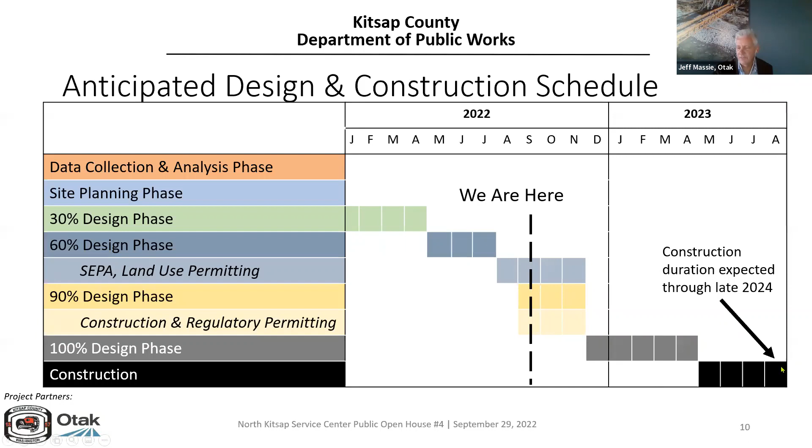This little footnote here shows that the construction schedule runs off this page, but we see this as being a 2-season construction being completed in 2024.

So the completed phases, like we showed in the schedule, I'll give a little more granularity to it. The data collection analysis phase includes things like topographic survey, geotechnical investigation. We confirmed the critical areas, the quality of the stream, the quality of the wetlands and their buffers.

We went through a site planning phase in which we had 2 main alternatives that we came up with. We analyzed those two alternatives. We compared them, including the relative price of one to another. The county did select alternative A.

From that alternative A, we started developing the 30% design plans, refining that alternative A. We brought in all the disciplines - architecture, landscape architecture, stormwater, civil - to refine the design and come up with those plans that we need to.

We gave that set to the county. They provided comments. We addressed those comments in our 60% design phase and kept refining the design as we went along. Currently, we're in the 90% design, like it showed back in the schedule.

We got the 60% design comments from the county and we're incorporating those comments into the 90% design. With that, I'm going to let Sierra introduce herself and talk more about the permitting and the environmental review.

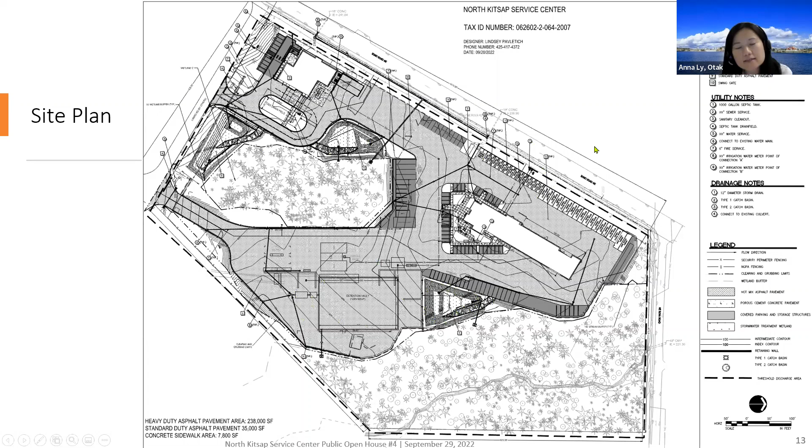The county code requires a roadside setback and separation buffer, so we have two rows of planting along this road, as well as two rows of trees and shrubs and ground cover planting to provide a site barrier. There's also planting along Lambird Road, and planting within the stormwater wetland ponds and around the wetland buffer.

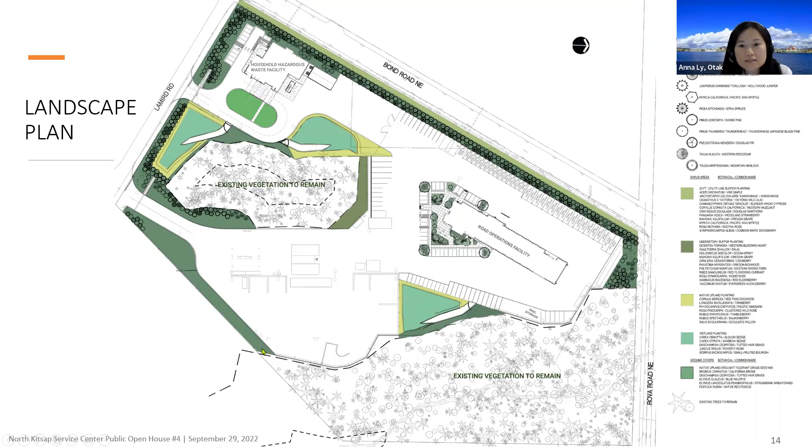On the next slide you'll see some of the different types of plants we've selected: overstory trees at the buffer area, understory tree buffers, and utility line buffer planting. On the following slide there's more understory buffer planting, and the county may simplify this palette once we get further into the design.

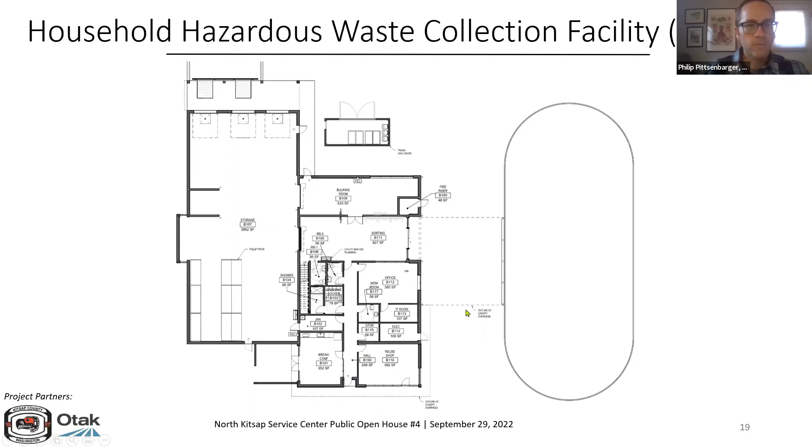On the left-hand side, we see that roof structure again, where we have a sloping roof transitioning to a vertical wall and a large amount of storefront glazing, which will be the reuse shop for the public. That's kind of the most prominent architectural feature in this building.

So we still have a lot of nice natural daylighting throughout the storage and utility areas, to have natural lighting and reduce artificial lighting. It's a nice sustainability feature.

We've developed the materials a bit more since the previous meeting. Like I said, the main structure is concrete tilt-up panels, so those will have various joint patterns and a mixture of light and dark gray concrete. Then there's some framed walls that'll have a different material, a fiber cement, number 8 there, which will probably be a dark material that blends in with the dark concrete so that we don't stand out too much.

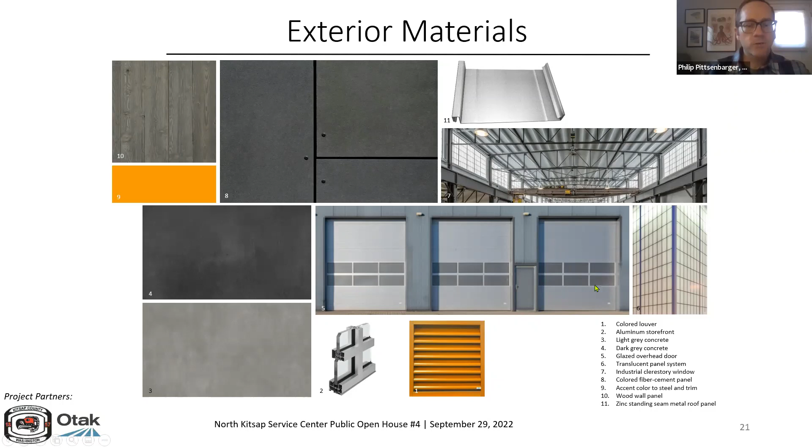Thank you, Philip. So where are we going in the future with this project?

So the future phases, after we finish the 90% design, comes the 100% design, as one would think. Sierra mentioned something about the construction permitting that's going to be going on during the final design phase. So obviously we're going to take the 90% plans, refine them, take the review comments that we get from the county, incorporate those, and put together a construction contract manual.

It consists of the plans and the specifications, in which the county can issue a notice of call for bids, receive bids from interested contractors, award likely to the lowest bidder, and put together a construction contract, which the county will administer, probably with some help from not only the Otak team, but perhaps a third-party construction manager.

And then the construction will start taking place like it showed on the schedule. We'll show that again here in just a minute.

But the basic elements of the construction will be temporary erosion and sedimentation control, clearing and grubbing, and a lot of grading. We want to utilize on-site materials for most of our grading, to take some of that hilly surface and make it flatter so we can put up the buildings and other features there.

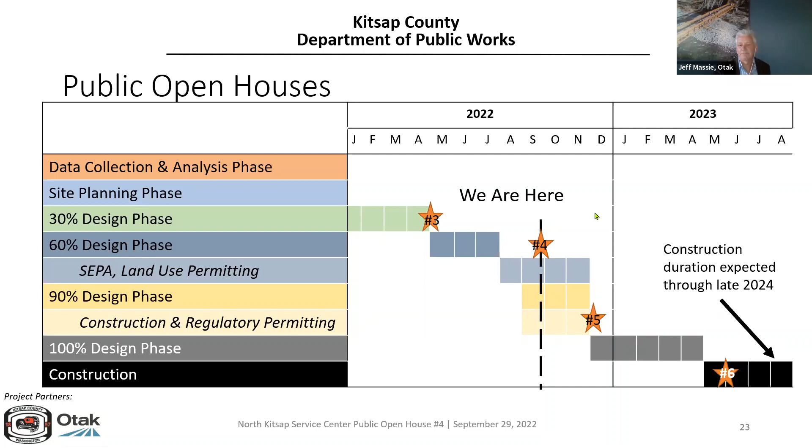Great, thank you, Jacques. Good evening, my name is Eirik O'Neill. I am the outreach coordinator for Kitsap County Public Works Roads Division. And at this point, we will go ahead and open it up for questions.

The first question we received was, Jeff, I'll toss this to you. The question is, what does Otak mean? I came to work at Otak a few years ago, so I looked it up online, and I think Otak means like brains in Indonesian. I don't know if that's happenstance, but really most consultant names like Otak are an acronym that stands for the founding fathers of the firm. I can't remember the names of the founding fathers, but I can remember the name Otak as the acronym.

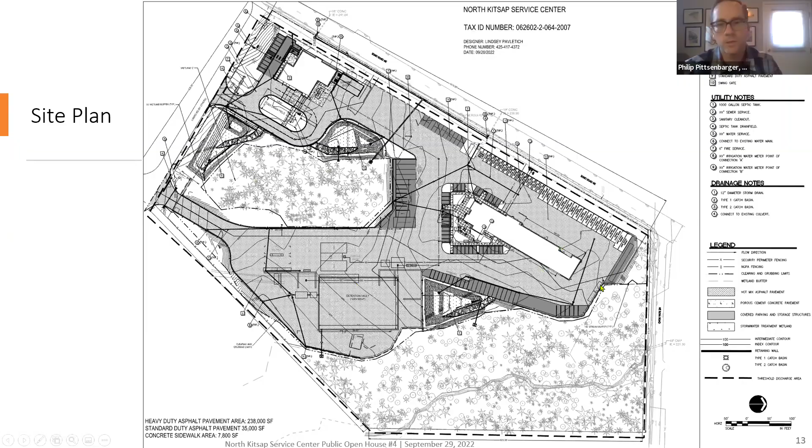I can speak to that. New Washington Energy Code is probably one of the most stringent in the United States, so any new building is required to be extremely energy efficient. We ran the energy modeling through the state's software, and we beat the current energy code, so they're pretty energy efficient buildings. Inside the tilt-up panel walls there's a large amount of rigid insulation to help the heating and cooling.

The maintenance bays, by nature, are not very energy efficient because we have large doors and openings for trucks to drive through, so that's a partially conditioned space. The walls between that and the office space are also insulated, so we save energy there. A lot of daylighting and radiant floor heating in the maintenance bays is a very efficient way to heat a space like that.

The Washington Energy Code is so stringent that all the lighting will be LED. We'll have photovoltaic panels on the roof to help offset energy loads. Natural light is probably one of the biggest things, along with large amounts of insulation in the walls. So they're very energy efficient, especially compared to older buildings of a similar type. It does a really good job.

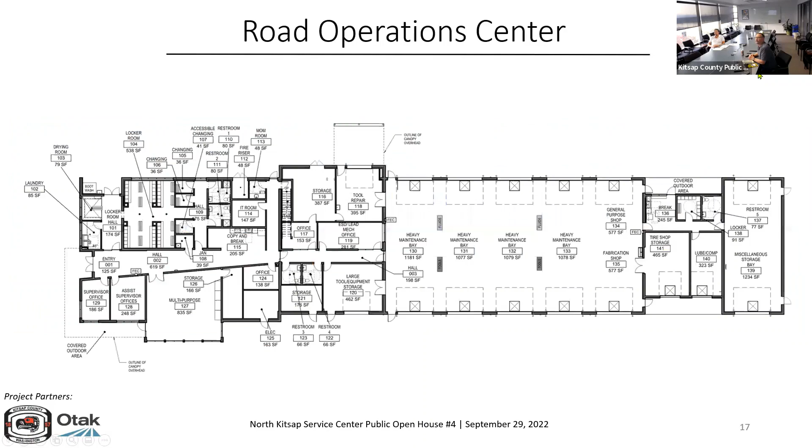I live on Gunderson Road and am concerned about all the traffic that will be generated. The entrance to the facility is very close to the intersection of Bond Road and Gunderson Road. Drivers frequently fly around the corner onto Gunderson. I foresee a lot of traffic accidents in the future for drivers who don't know about the entrance to the facility. How is that going to be taken care of?

Jacques, you want to take a shot? I can lean in. Sure. So our traffic engineers have done traffic counts out at this location.

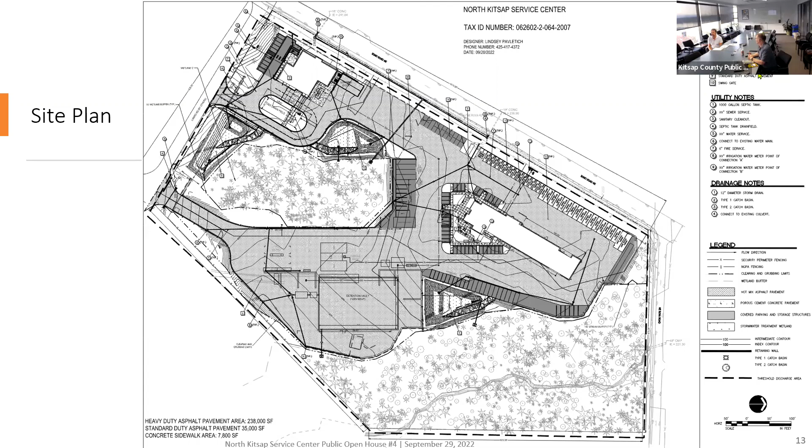As the roadway is opened up and we get more and more use in that whole area, because there's other parcels in this area that are going to be developed in the near future as well, they will keep a close eye on that. There'll be signage on the roadways in advance to notify traffic of the development. It's something we're just going to have to keep our eye on and monitor closely. It may require some additional tree removal on the inside of that corner for longer sight distance. It's just something we're going to have to evaluate as development occurs in this area.

Thank you, Jacques. I've got a comment from Mike. Risk analysis processes are used in all major projects. I would suggest you ask this question to your gatekeeper or responsible/accountable persons. Thank you for that comment, Mike.

I can address that a little bit. One of the major things in project management is risk management. A lot of that has to do with trying to understand the unknown knowns - in other words, what could go wrong. We didn't go into an in-depth analysis on that, it wasn't part of our scope. But let's just say there are a lot of things that can hang up the schedule of a project. So we try to keep an eye on those risk elements, try to foresee what could hang things up. It could be permitting, things that are sort of outside of our control. So as a project manager, you're always trying to keep an eye out for things that can go wrong and what you can do to mitigate those things ahead of time or after they might occur.

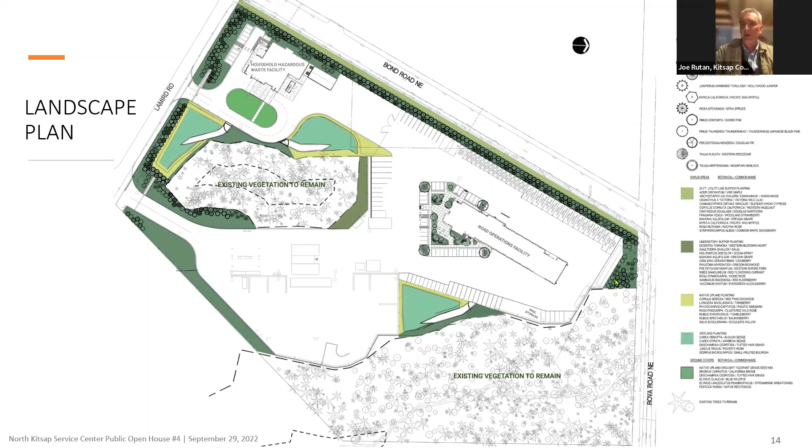Thanks, Commissioner. There's been lots of dirt work going on there over the last several months, so I thought something significant was changing there.

I could speak to that. The dirt work you saw going on there was construction of the internal roadway. In addition to that, the proponent of that property opened up the old stream that existed there. Many, many decades ago, it had been tightlined in a closed stormwater facility, underground pipe and catch basins. He has opened it up so it's a natural stream again through that property. So that'll be a nice amenity there as well, and will enhance the ability of salmon to move upstream. It's a great amenity, a great improvement to that site.

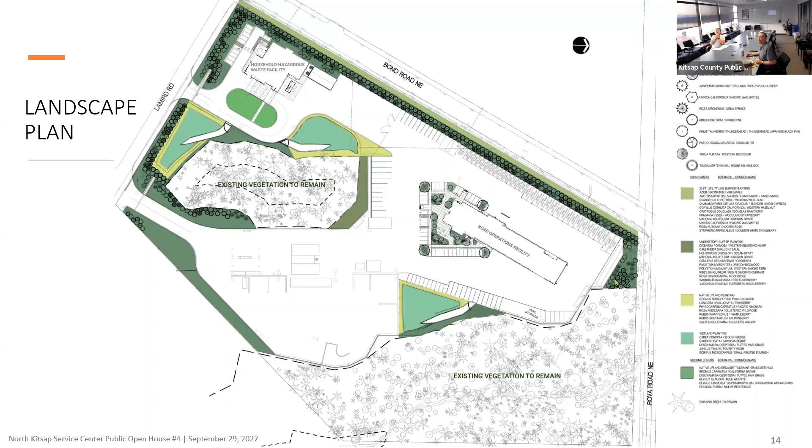Thank you, Joe. Next question is from Cheryl McCurdy: I have never seen LAMIRD Road. Where is it? Are you going to rename Gunderson Road?

LAMIRD Road is just an identifier for the roadway that was constructed on that parcel between Gunderson and Bond. You can see it if you live there, you've seen the road being constructed. It will have a different name. LAMIRD is the zoning acronym for that area, meaning a limited area of more intensive rural development. So we've been referring to the roadway in our discussions as LAMIRD Road, just so everybody was on the same page when we were talking about it, but that's not going to be the final road name.